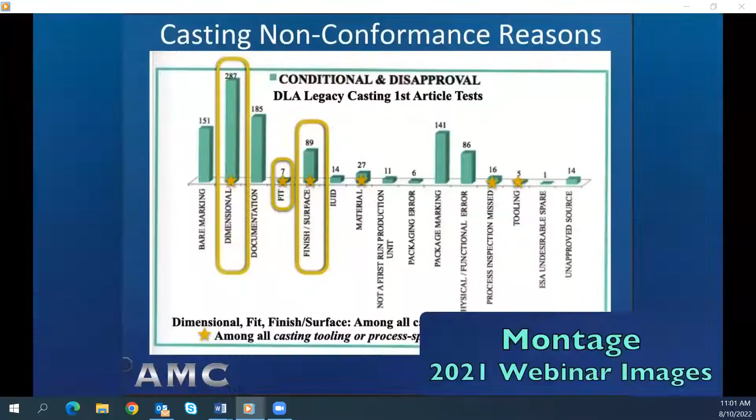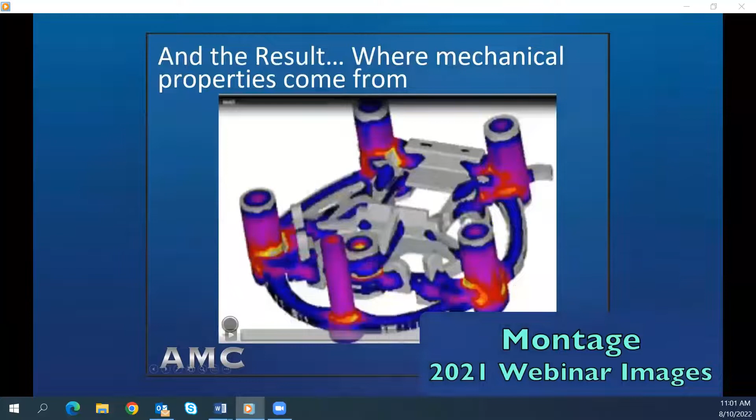This new webinar series is a continuation of the theme of our Casted Team 2021 webinars, helping new contract awardees in the production of DLA legacy castings with insights to shorter lead time for first article approval and production launch. The 2021 practical foundation in both Casted webinar series was manufacturing engineering for legacy casting launch success and first article approval success. The 2022 Practical Foundation is the project management that precedes the manufacturing engineering of a legacy casting launch, especially in the context of a cold start new awardee who is a machine shop.

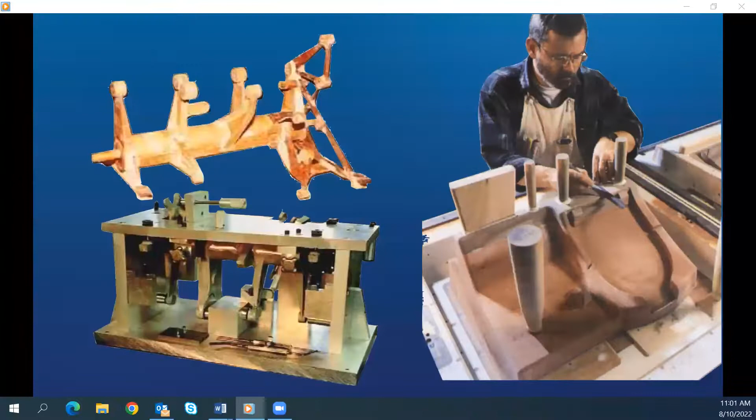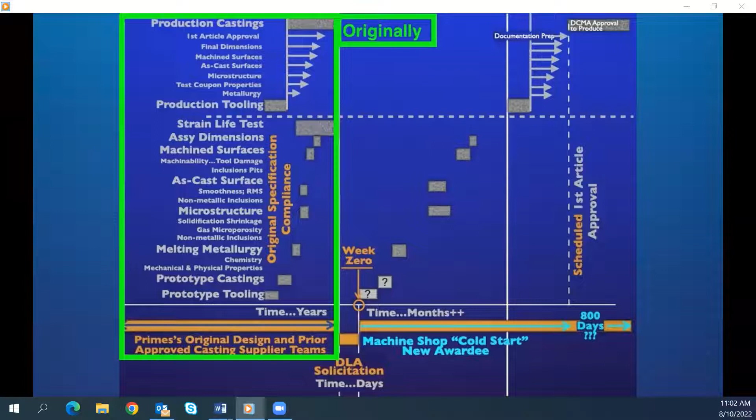In our 2021 series, we coined the term cold start to designate a legacy casting contract for which there is no existing approved casting source. The tooling may be lost or unavailable, and metal casting tooling can be complex and expensive, especially for high specification military castings. And lost or unavailable includes machining fixtures. The original metal casting source spent many months manufacturing engineering its processes to become approved. Now all of that manufacturing insight is lost. To reconstitute the manufacturing engineering of successful compliance with a complex technical data package has to be reinstituted in fewer months by a new awardee and its manufacturing partners.

Generally, machine shops are unfamiliar with the manufacturing engineering of metal casting processes. The concept of a metal caster's project management for a casting launch is even less familiar. We are calling this webinar series a project management walkthrough of the tooling, design and construction, and manufacturing process choices for low-volume legacy castings for either DLA Aviation or DLA Land and Maritime.

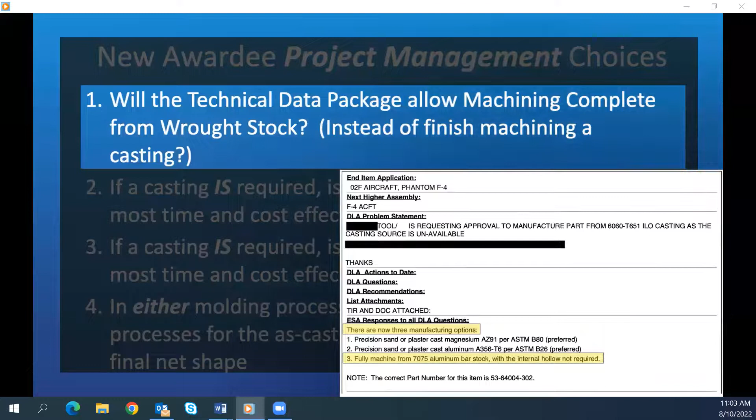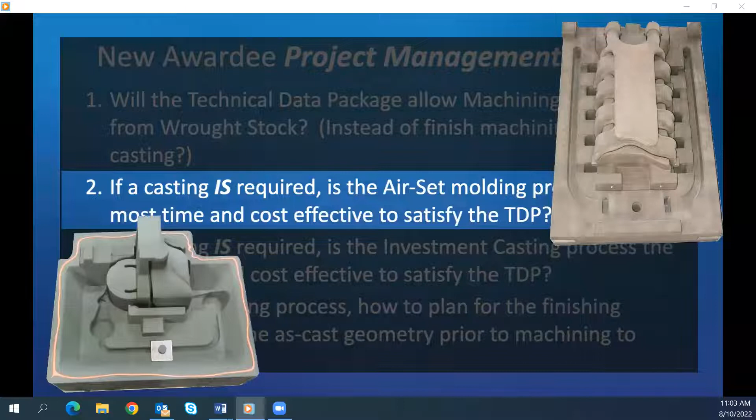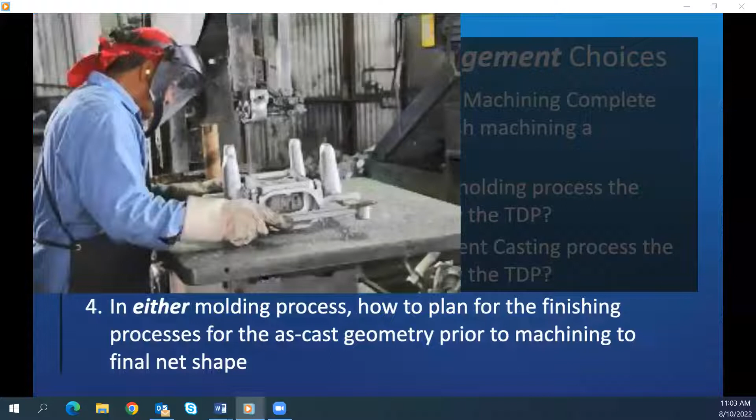Since 70% of new awardees for DLA legacy castings are now machine shops, the initial project management choices for such a new awardee are: first, cast versus machine from wrought stock. Second, if cast, is the air set sand molding process the most time and cost effective for complying with the technical data package? Or third, if cast, is the investment casting process the most time and cost effective? And finally, in either casting mold process case, how to plan for the finishing processes for the as-cast geometry prior to machining to final net shape.

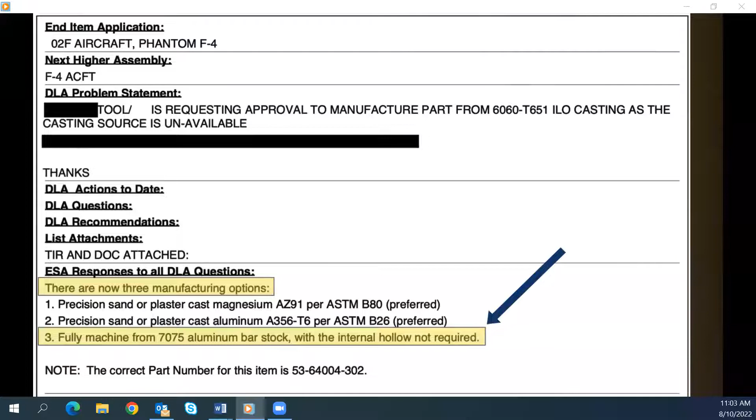This series walks through the project management of each of those four legacy casting launch manufacturing choices. First, among the four webinars, is the evaluation of the technical data package from the viewpoint of a machine shop. Is it possible and allowable to machine the required geometry from a block of wrought metal that has similar mechanical properties as the designated casting?

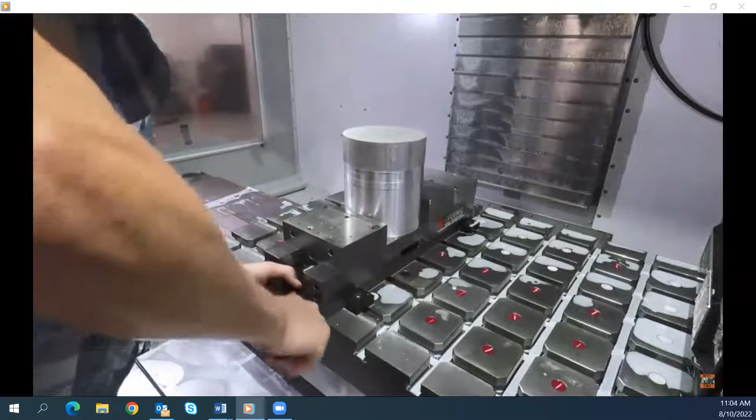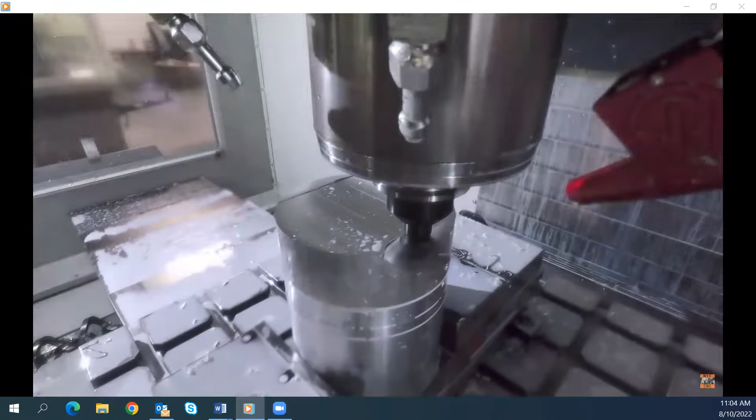Here's a short sequence of a 5-axis CNC machining a piece of an aluminum bar. Compared to setting up as-cast surfaces in a machining fixture, just clamping the bar is very simple. Later in this same video, we will see extensive cavities milled into the same bar once the exterior profile is finished. So machining the equivalent of a casting from wrought stock is attractive to a machine shop. Is that allowable is our question in this part 1.

It is probable that project management is an unfamiliar concept, especially in the context of launching a machine from wrought stock component or finished machining a casting. But it is a powerful concept. While I introduce our next two webinar contributors, enjoy this time-lapse video of project management executed at the highest level, building a bridge over water. As you will see, nothing arrives too soon, nothing arrives too late.

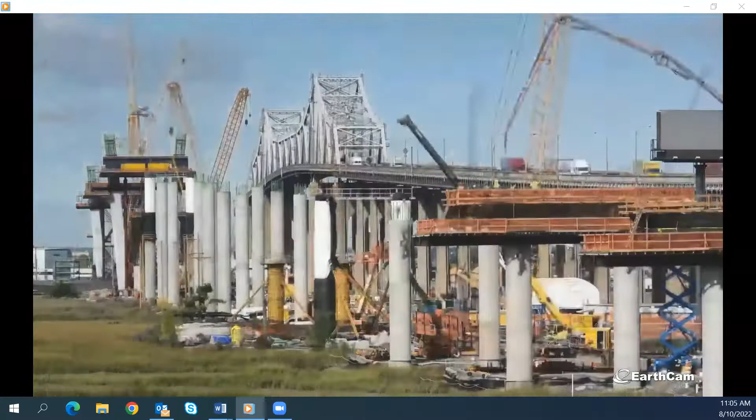And the early sequences don't make sense until you see how the whole complex puzzle fits together for the fastest, most efficient end result. Leading off our 4-part series and guiding us through part 1 is Keith Sturgill, our Casted teammate based at DLA Aviation in Richmond, Virginia. Keith is both a materials engineer and an aeronautical engineer with an extensive background in airframe and aircraft engine components. On our team, Keith knowledgeably assists cold start new awardees find metal casting sources, find existing tooling, and assist in answering technical data package questions.

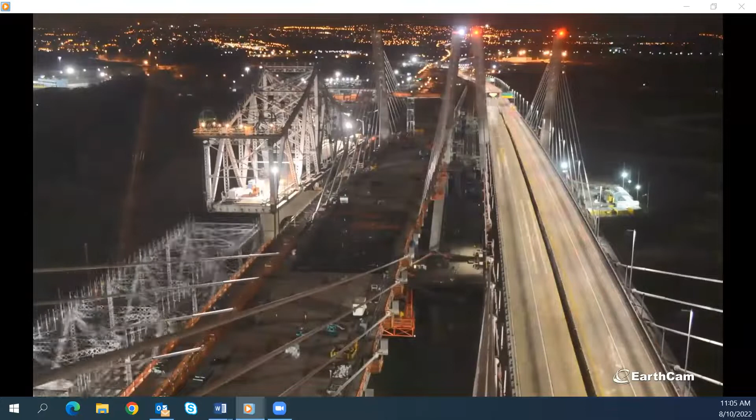Before introducing Keith, Mike Wynn will briefly summarize what project management is in the context of a cold start launch of a complex DLA legacy metal component.

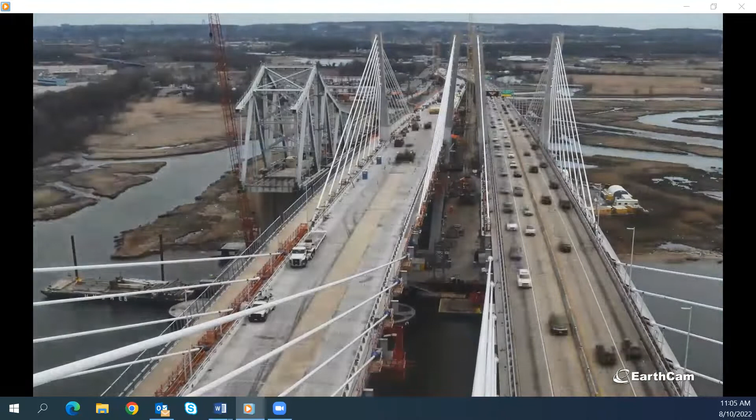Here's Mike. The objective of the 2021 and this 2022 four-part webinar series has been, and is, to help DLA procure more efficiently important replacement parts designed as castings for the U.S. warfighter. Procuring, approving, and producing these legacy cast components is very difficult.

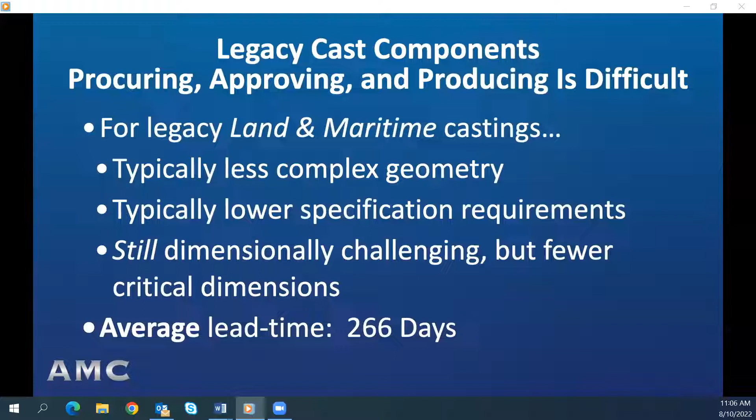Unbelievably, the average lead time for legacy aircraft castings is 800 days. While most land and maritime castings are not as demanding in specification and difficult to produce, the average lead time for the land and maritime legacy castings is still a significant 266 days.

Since the DLA bid window is very short, 8 to 10 working days, the likelihood of thoughtful analysis of a legacy casting technical data package is slim for any bidder. That evaluation is more difficult for a machine shop less familiar with the unique technical data package elements for a casting. Here are prominent considerations that a machine shop cold-start new awardee should address immediately upon the award of a legacy casting contract.

Immediately after award, study the technical data package as would be prudent for any component, but focus on the requirements that are casting specific, such as the material specification, which for a casting will be different and more complex than for an equivalent wrought metal specification.

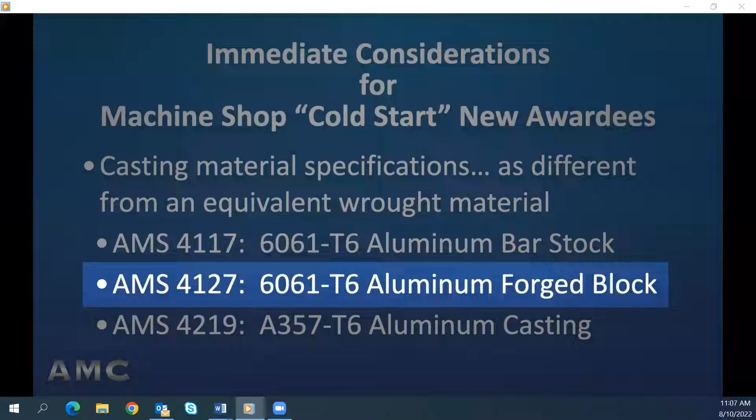For example, here are the AMS Section 4 quality assurance provisions for machined from bar stock 6061 aluminum, for machined from forged block 6061 aluminum, which is more extensive because of grain alignment, and the comparable A357 cast aluminum. Section 4 is far more extensive for the cast aluminum.

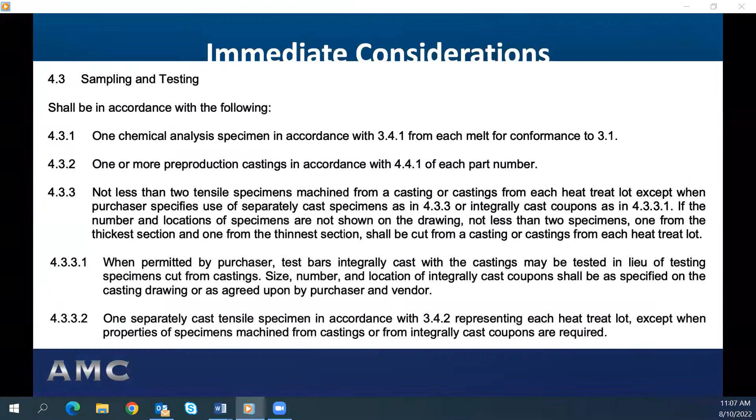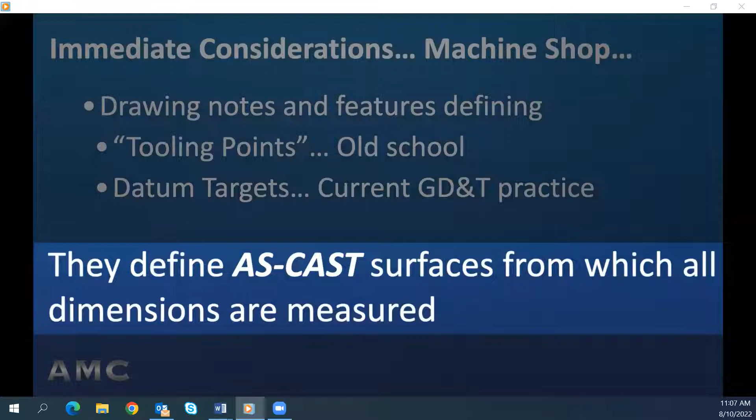The drawing notes and features defining tooling points or datum targets for setting up the casting against as-cast surfaces, from which all dimensions are measured. As-cast versus machined tolerances.

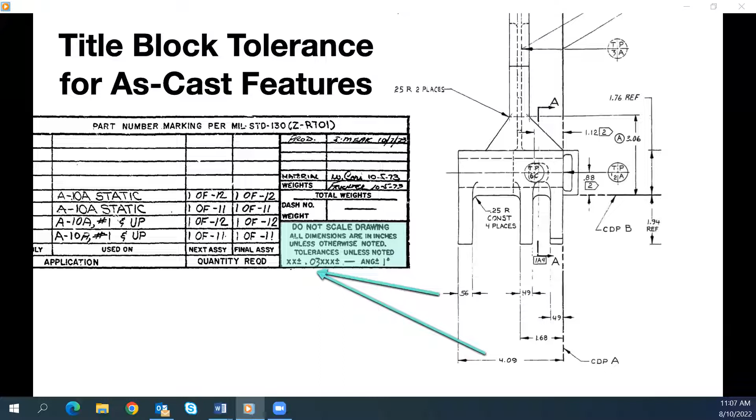There are typically separate drawings: the casting drawing with entirely as-cast features, and the machine drawing with as-cast features plus features upgraded by machining, possibly assembled features as well. Casting drawings have casting specific tolerances and important casting related notes.

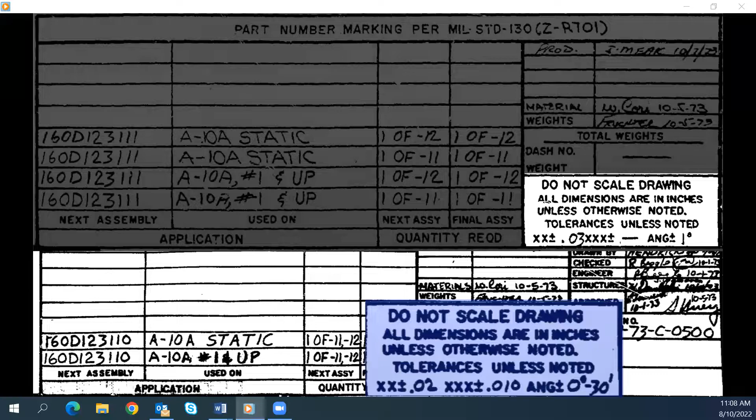For example, as-cast and machine tolerances, which are widely different. Drawing notes regarding as-cast surface finish. Drawing notes regarding as-cast fillets and radii. Drawing notes regarding maximum draft angle, but watch the offset.

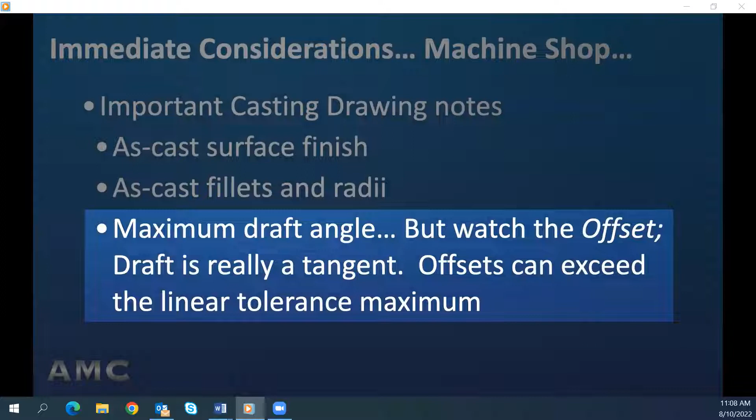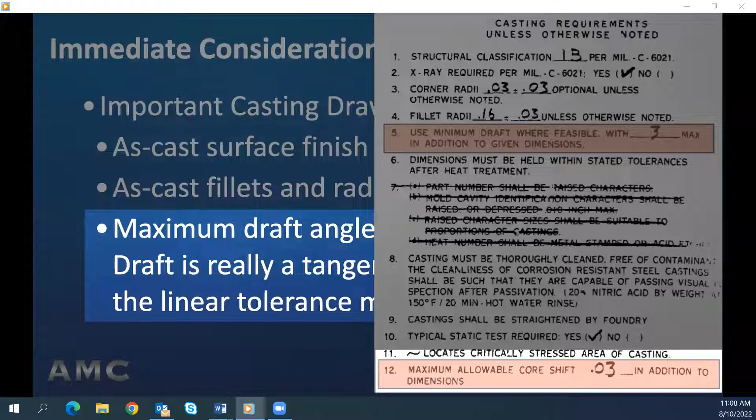Draft is really a tangent. Offsets can easily exceed the linear tolerance maximum. Here, however, the drawing note allows 3-degree maximum draft, and the draft offset can be added to a feature dimension plus tolerance. Notice also that core shift is allowed up to 0.03 inch as additive to the feature dimension plus tolerance. Knowing what these notes say is really important.

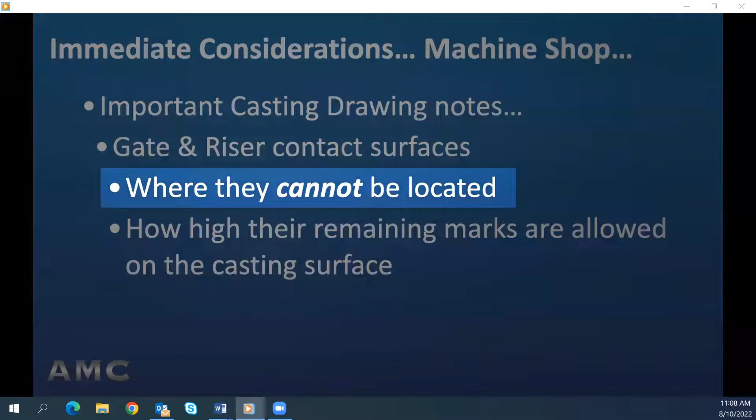Drawing notes regarding gate and riser contacts, where they cannot be located, and how high their remaining marks are allowable on the casting surface. Once the technical data package is fully studied and understood, the foundational first step is to plan the project from start to finish.

Notice that I said a new project. Launching a DLA low-volume legacy casting is not business as usual. In our scenario, a new project is a temporary and unique endeavor. It is to produce a small quantity of legacy castings with a defined beginning, a time-constrained end, and a highly specified set of requirements.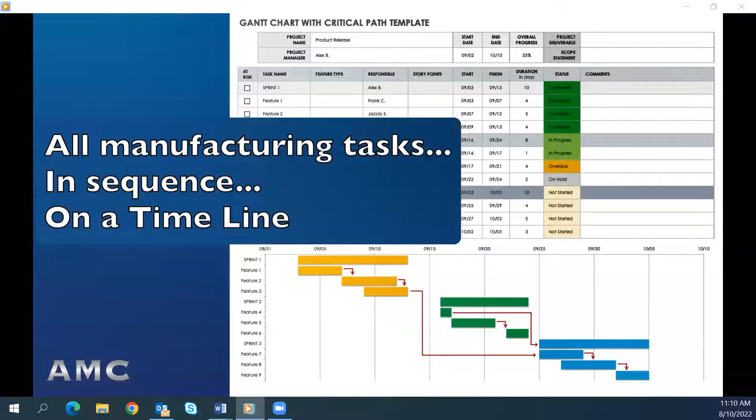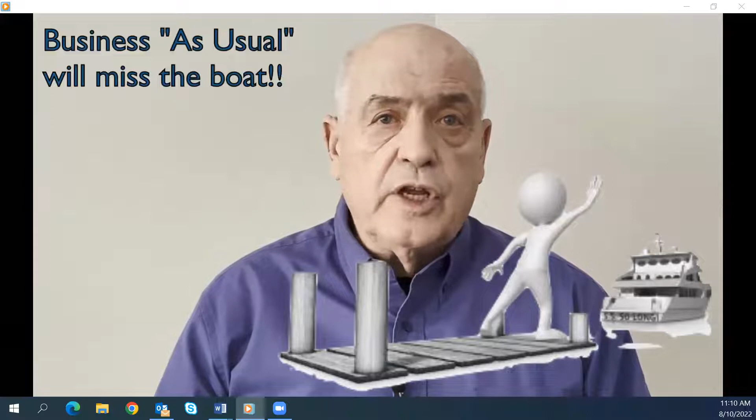Fully developed project management defines all the manufacturing tasks in advance, their requirements, their predecessors, and their place in a timeline. So the point is that producing legacy castings under a contract with DLA is not production as usual, in which the awardee just starts in the usual business context. Instead, it is a new project that needs to be managed with a plan before anything just starts.

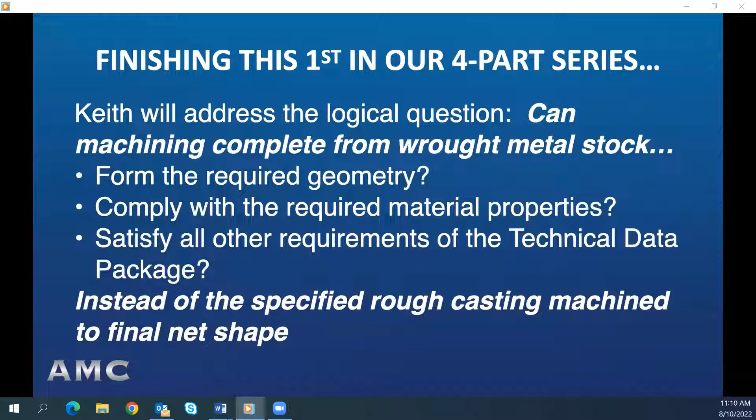Finishing this first part in the four-part webinar series, Keith Sturgill will address the reality that the awardee is probably a machine shop, and he addresses the logical question: can the required geometry, material properties, and other technical data package requirements be satisfied with a shape fully machined from wrought stock? That is, instead of the specified rough casting as the material starting point for the finished net shape. So now, here's Keith to articulate the considerations of cast versus fully machined.

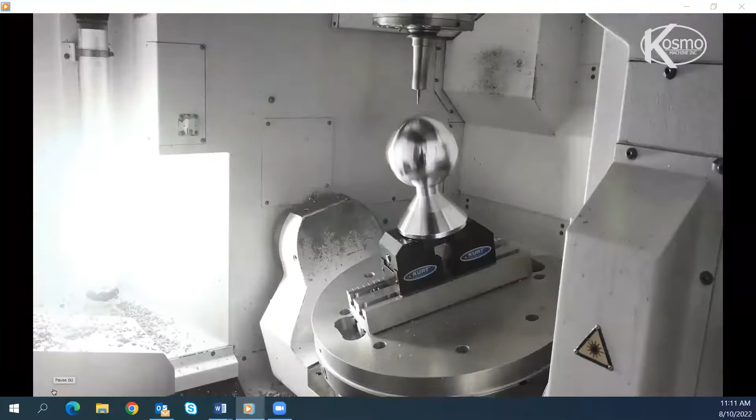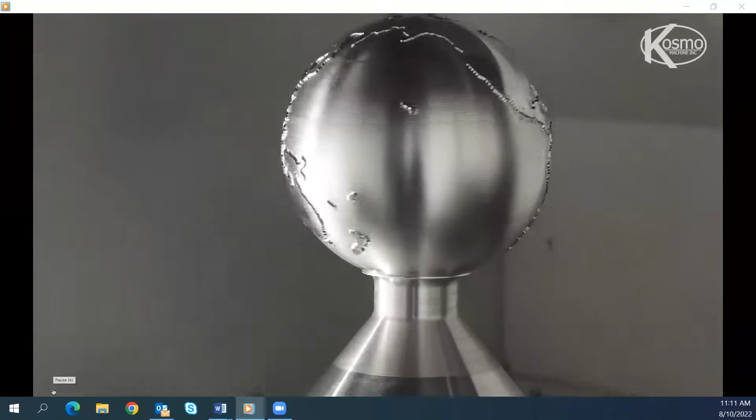As Mike mentioned earlier, a logical post-award question a machine shop could ask itself is, since machining is what we do, can we accomplish the component's requirements by machining it complete from wrought stock? Today's multi-axis spindle and multi-axis pallet CNC machine tools often enable complex geometries to be 100% machined from a wrought block of material—that is, from plate, bar stock, or forged block. This would include shapes that previously had been castings.

Since casting tooling and prior manufacturing engineering knowledge is likely lost for these cold starts, 100% machining from wrought stock could possibly eliminate potential problems, not the least of which is finding a metal casting source to produce the casting. The typical machine shop awardee is far less familiar with net shaping a rough casting compared to net shaping a rough block of wrought material.

So what are the considerations involved in a request to switch from a cast component with significant specifications to a fully machined equivalent with the same significant specifications?

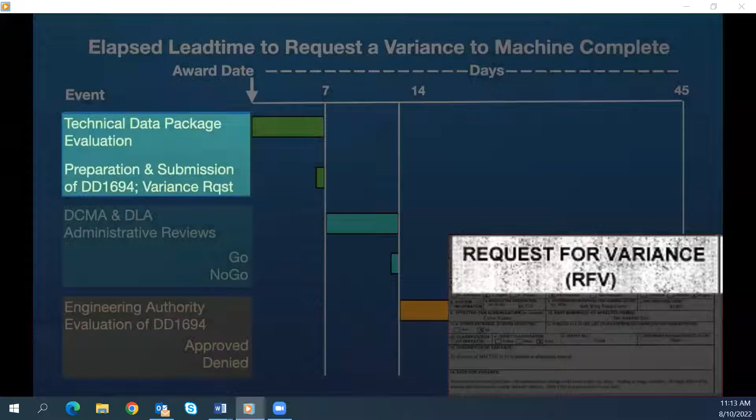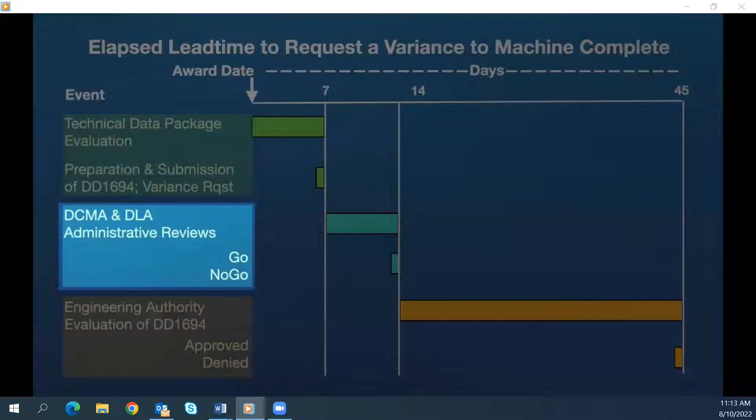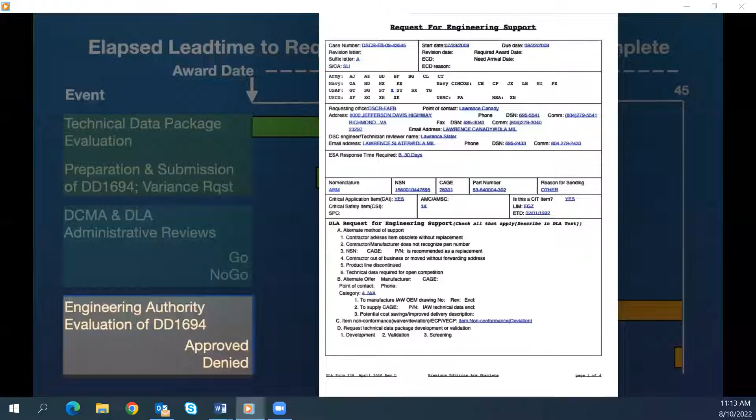Well, foremost is the requirement for a request for variance. The request for variance process is accomplished using form DD 1694. The form is submitted to the Defense Contract Management Agency's contract administrator. It is reviewed by them and then forwarded to the DLA contract administrator. If believed worthy, it will then be forwarded to the engineering authority for the component, who will evaluate and then accept or reject the request.

Since a delivery date has already been established in the contract, the elapsed time to request a variance and get it approved is a project management consideration. The typical required response time from the engineering authority to review and approve or deny a variance request is about 30 days. Additionally, it takes a week prior to that for the cold start awardee to fully understand the technical data package and determine if machining from wrought stock is a possibility. And probably another week for the contract administrators at both DCMA and DLA to evaluate and forward a request for variance believed worthy of engineering evaluation. So the combined loss of lead time toward a defined contract delivery date would be probably about 45 days. And this is without any guarantee of engineering authority approval.

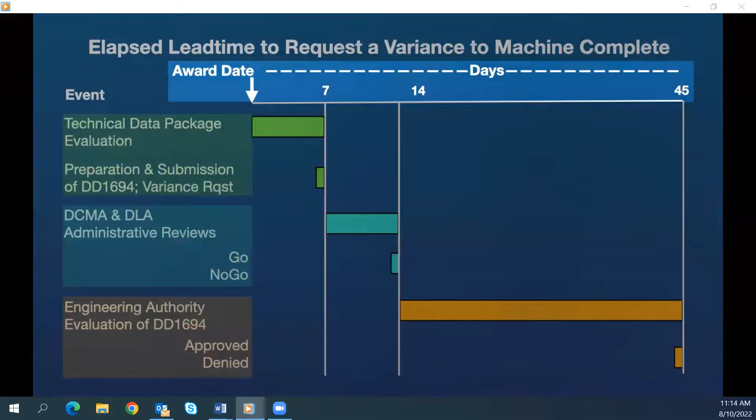In the context of the cast component's design, application, and service, the engineering authority will investigate some things, such as: what is the service classification for weapons system safety? Is this a critical safety item, in other words?

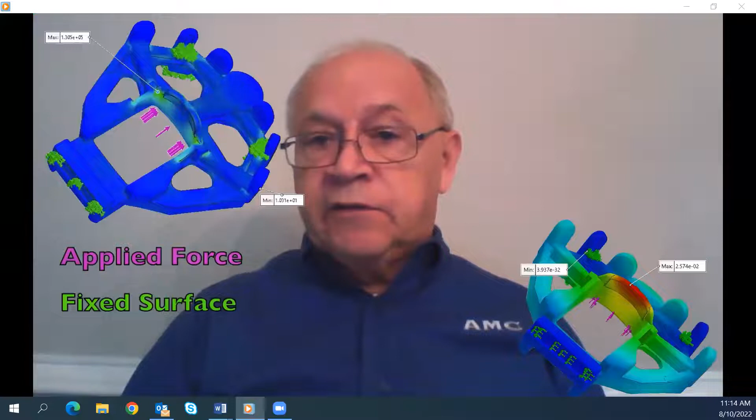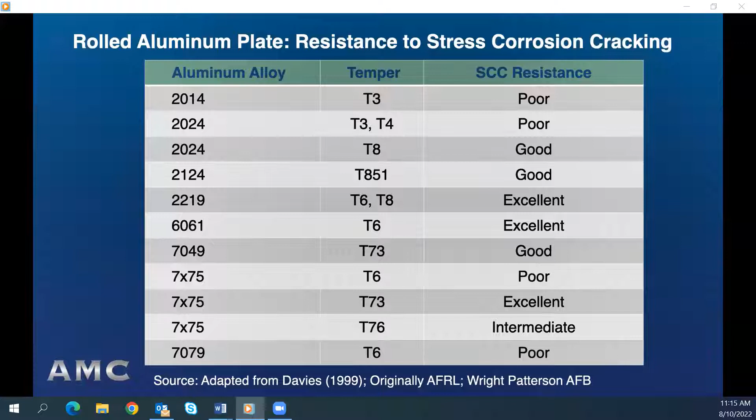Another question they would look at is, what is the load case on the casting? And also, is the proposed wrought alloy sufficiently strong and ductile in both its longitudinal and transverse grain orientations? The reason for looking at that is they want to consider whether stress corrosion cracking will be a concern for the alloy chosen. In some sustained load cases, such as with press-fit bushings, the isotropic grain structure of a casting might actually be preferable to a stressed transverse wrought grain orientation. In other words, the unaligned grain structure of castings in some alloys may resist stress corrosion cracking in service actually better than a similar wrought alloy.

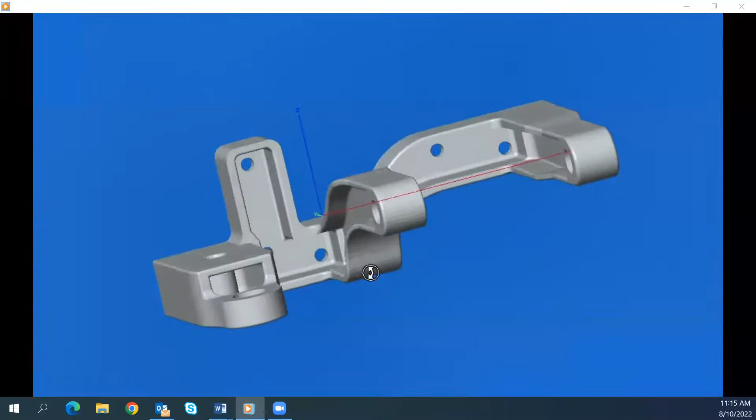Something to be considered. Another very important question is, does the part geometry have interior cavities not amenable or accessible to 5-axis machining?

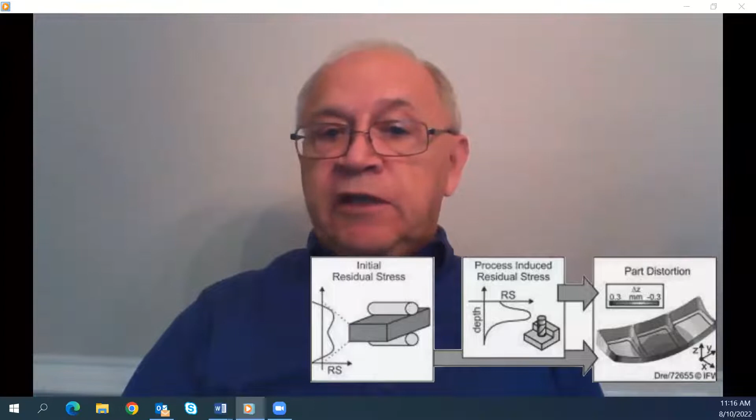Here's something else I've learned from personal experience. Thin-walled parts machined from stock are pretty typical and very common among airframe components. I'm talking about when these are machined from wrought stock - they will distort. So after machining, or even during machining steps, thin-walled parts machined from wrought aluminum or magnesium will have to be solution heat treated to soften them prior to straightening. You need to be aware that these age-hardening alloys stiffen and harden and become almost impossible to straighten within hours. Because of the magnitude of these residual stresses, machining may actually have to be done in multiple light cut stages, with heat treat softening and straightening between each machine cut. So an important question for a machine shop is this: is there in close proximity a capable solution heat treater to assist in the back and forth softening and straightening process?

Machining cuts on castings are less significant - in other words, they remove less volume of material. So typically, the straightening steps during machining are not required. So metal casters making thin-walled castings in these alloys typically have heat treatment in their finishing facility, and they also have either in-house machining or local machine shop partners. So the process is much easier to accomplish.

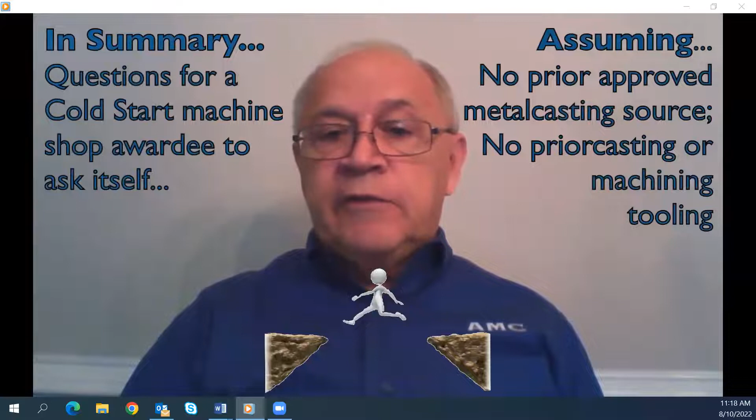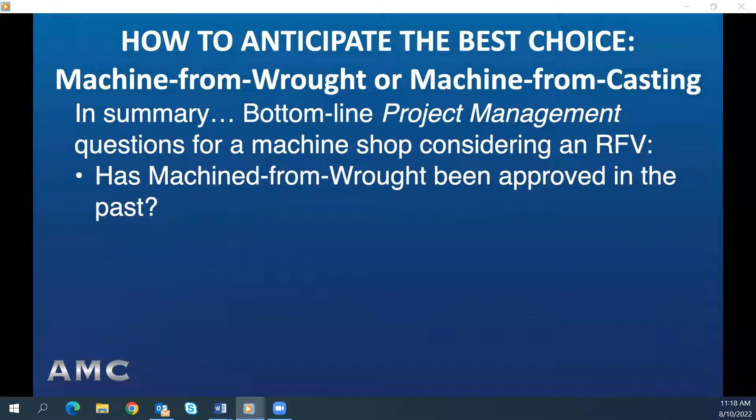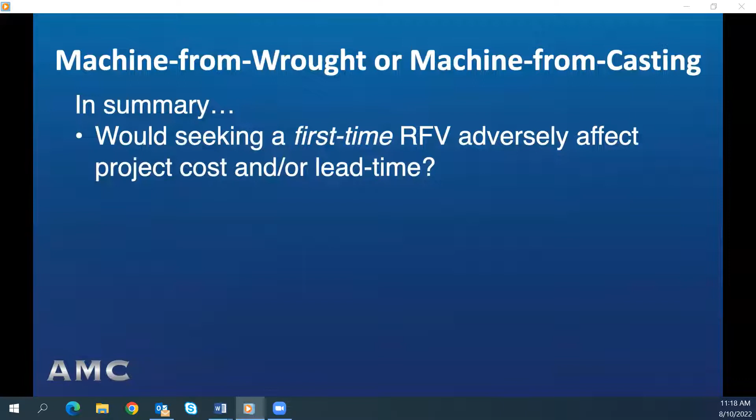In summary, here are a few bottom line project management questions that a machine shop should ask itself. These questions assume that a prior approved metal casting source does not exist and casting tooling cannot be found. So first, when considering a request for variance to machine the component from wrought stock, you would want to find out: has a request for variance to machine the shape from an approved wrought alloy equivalent been approved in the past? A second question: would seeking a first-time variance positively or adversely affect the component cost and the contract delivery date?

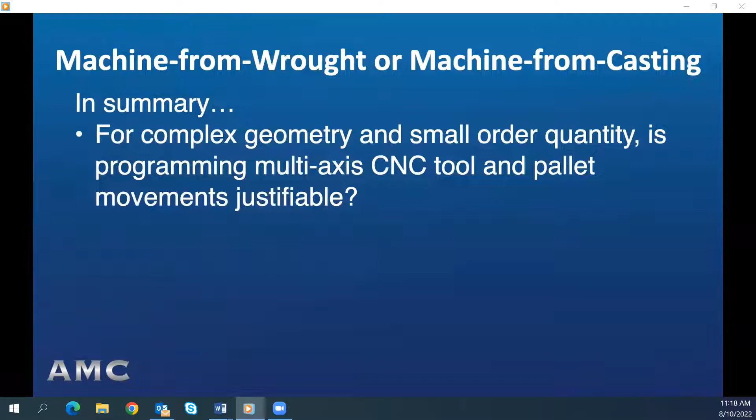Another very important question: if the geometry is complex and the contract quantity is small, would programming complex multi-axis CNC tool and pallet movements be justified? Probably for small contract quantities, that cost would be justified.

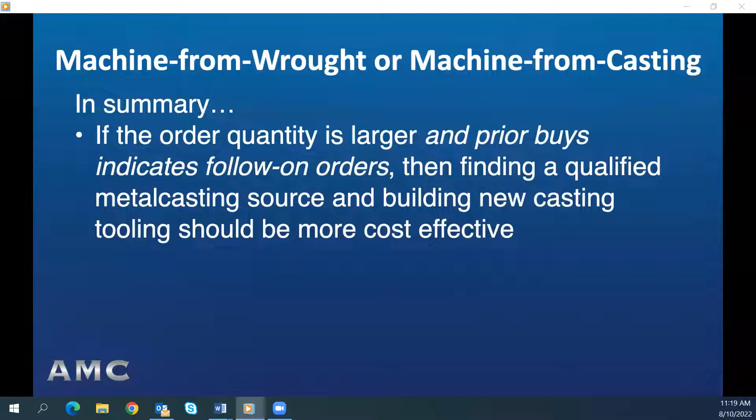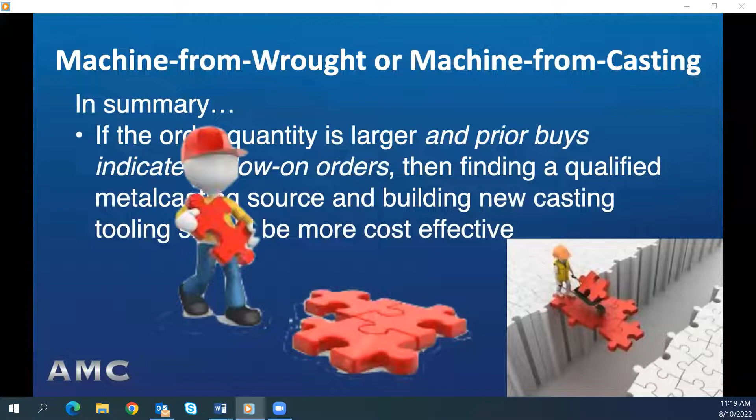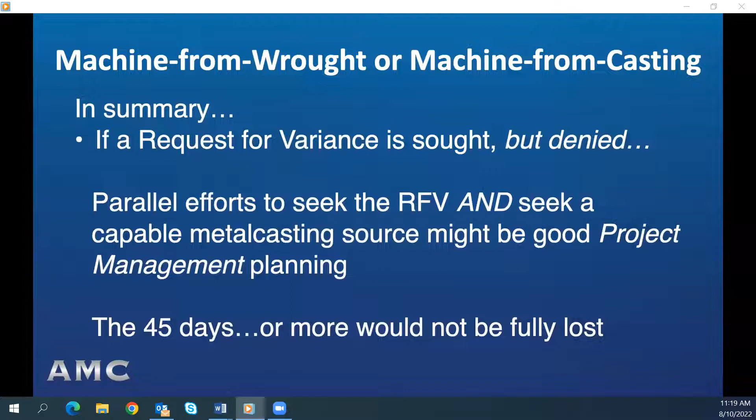However, if the contract quantity is larger and prior buys indicate follow-on orders, finding a metal casting source and investing in new casting tooling will likely be much more cost effective in producing the final machined net shape. And last but not least, if an RFV is sought but denied, can the 45 days or more lost lead time be made up? A machine shop would probably do well to consider parallel efforts. In other words, seek both a request for variance and a capable metal casting source, and consider manufacturing new tooling if tooling doesn't exist. Those types of things are good project management planning.

The high percentage of machine shop bidders for DLA legacy casting contracts is a logical consequence of the significantly changing demographic of U.S. manufacturing between machine shops and metal casters. In the 1950s, the ratio of machine shops to metal casters was 3 machine shops for every 1 metal caster. Machine shops have been more resistant to the decline in U.S. manufacturing than have metal casters, by a wide margin. By 2022, the ratio, even with some decline in machine shops, became 9 machine shops to every 1 metal caster.

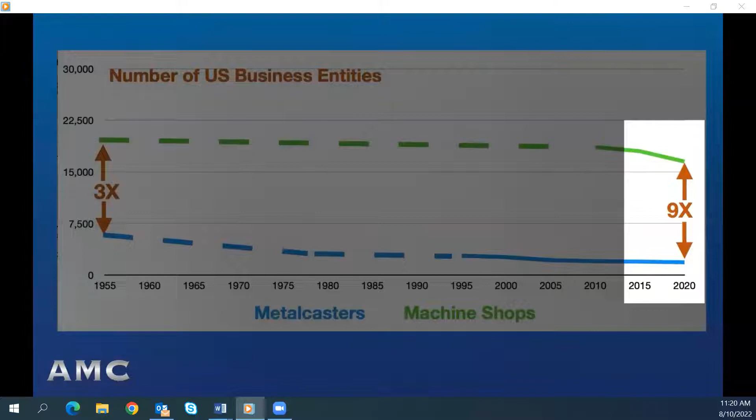Once a machine shop has won a cold start award, it is logical based on a machine shop's multi-axis machine tool capability to want to machine the shape complete rather than procure a casting, even if the machine shop doesn't realize that an approved metal casting supply chain is almost always broken and the tooling may no longer exist.

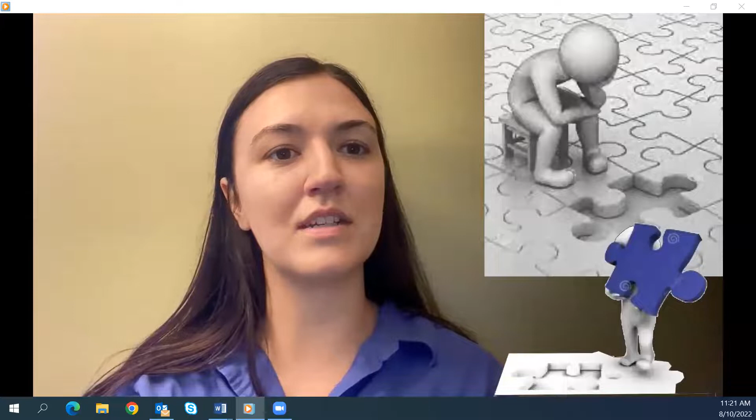It has been our purpose in this first webinar in the 4-part series to help machine shops in thinking through a process for a successful start to a DLA legacy casting contract. That thinking through process, that is project management for a casting startup, is probably unfamiliar to a machine shop cold start awardee. It's our hope that fleshing out machine or cast project management has been helpful to machine shops, illustrating that just starting the project as usual is the wrong tool for the task. Hopefully helpful in not falling short at the finish line or missing the boat entirely. It is also our hope that the complexity of cold starts for new awardees has also been enlightening to the DLA contracting and engineering authority folks as well.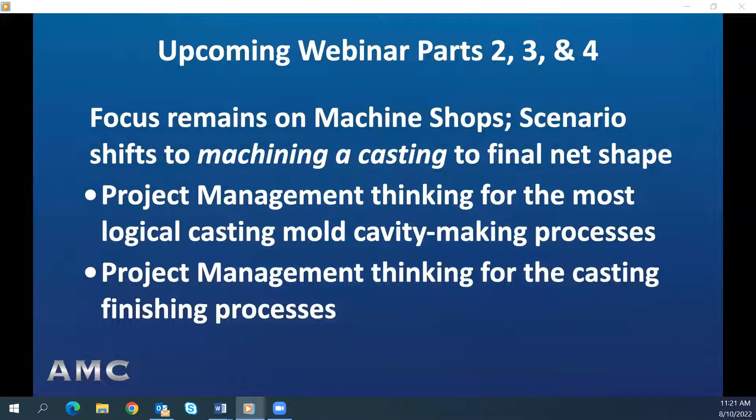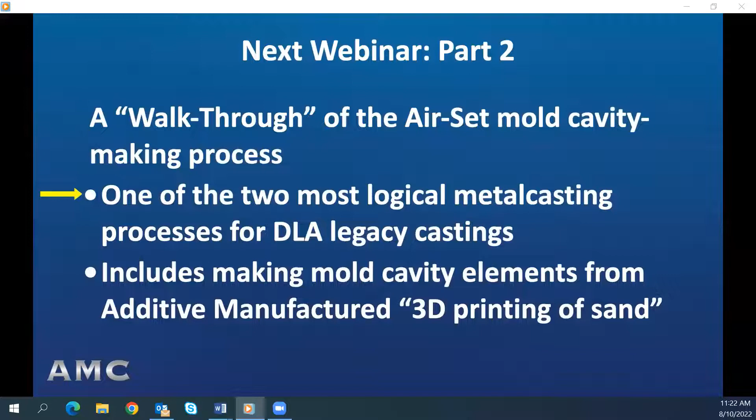If the awardee is a machine shop and the manufacturing process remains a casting, parts 2, 3, and 4 of this webinar series address project management thinking for the most logical metal casting molding processes and their finishing processes. In our next webinar in this series, our CAST-IT team will address a walkthrough of the air set mold cavity making process. The walkthrough will continue to focus on project management thinking. Air set, including making mold cavity elements from additive manufactured 3D printing of sand, is one of the 2 most logical metal casting processes for DLA cold start legacy castings.